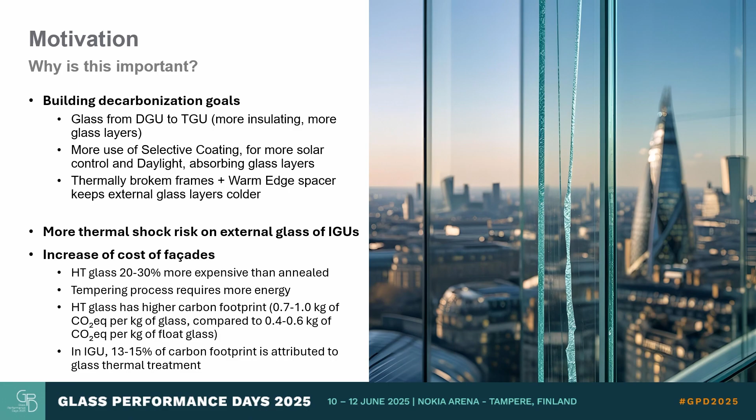So at the end, in an IGU, let's say that more or less 15% of the embodied carbon A1 to A3 of an IGU can be attributed to glass thermal treatment. So there's also an environmental value there.

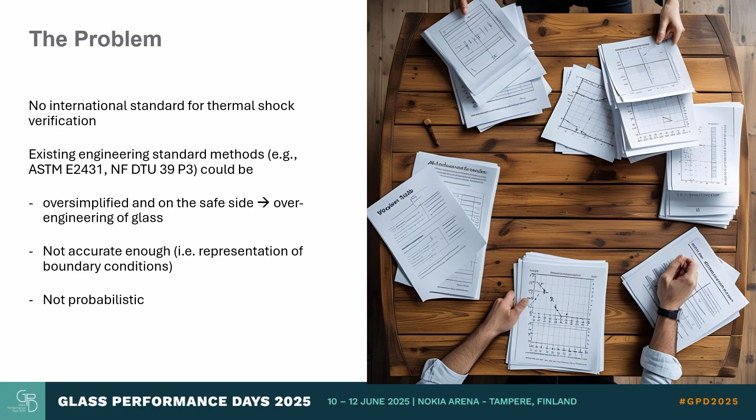The problem is that there are no internationally recognized standards to do a thermal shock risk assessment. There are some existing methodologies in national standards: the French DTU 39 P3 for IGUs and the ASTM only for single glass. These methods could be sometimes oversimplified. It means that maybe we are over-engineering the glass and strengthening it when we don't need to.

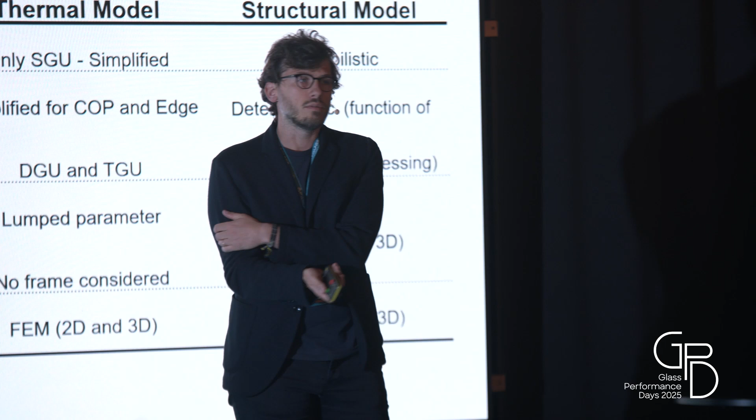The question is whether these are accurate enough. Do they give a good enough representation of the boundary conditions that we have from the climate? And they are not probabilistic. Due to this lack of standards, in the industry there are a lot of best practices to solve this problem. In this table, a comparison between the two standard approaches and more complex best practices related to how you choose the boundary condition, the kind of thermal model and the structural model you use. So in the DTU approach, you use a static boundary condition only for French territory.

The thermal model is simplified, so a one-dimensional thermal model for the center of panel and the edge, only in some conditions for double glazing units, and only partially for triple glazing units. The structural model is a deterministic model, so not probabilistic.

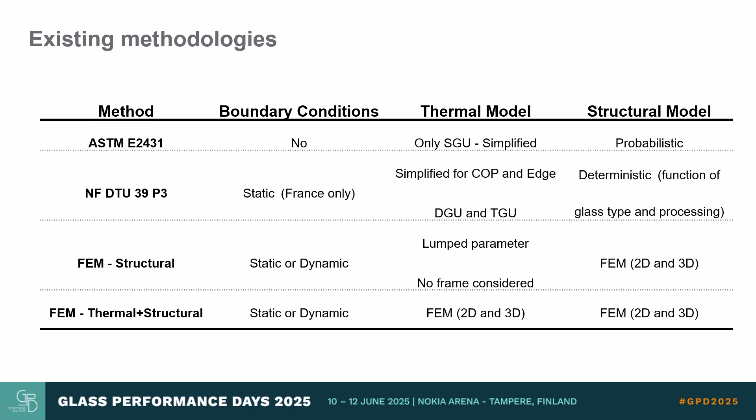In the best practices that are used, and there are different published works, by Permasteelisa or the University of Parma, a FEM structural model is used to evaluate the thermal stresses related to temperature differences that are calculated with a static or dynamic boundary condition, or sometimes with a coupled structural and thermal model altogether.

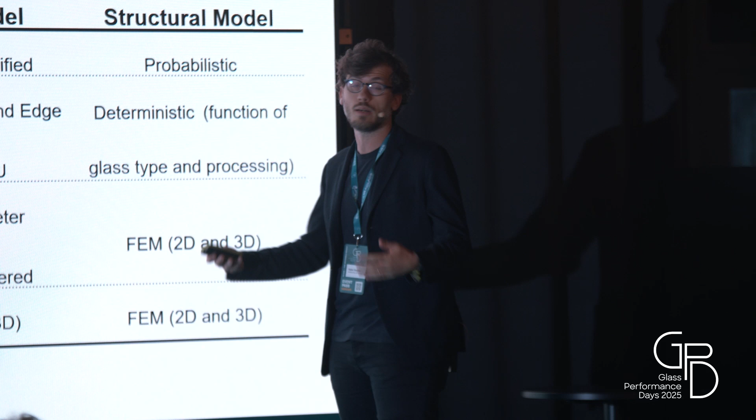So in any case, it seems that there is a lack of a trade-off between enough accuracy and the usability of thermal shock risk assessment for everyday use, because these best practices are very accurate, but they cannot be used by, let's say, a normal engineering studio or a glass processor manufacturer. They can be used for very special projects and conditions. And also, the vast majority of glazing is rectangular vision glass with framing, either windows or curtain walls. So not very special conditions.

So thanks to this project, what we tried to do is to develop a methodology that includes four fundamental steps. First of all, considering a probabilistic climate boundary condition. This probabilistic climate boundary condition gives a statistical representation of the climate, and is then used to have accurate enough glazing and facade element thermal models that spatially resolve this boundary condition for different tilts and orientations.

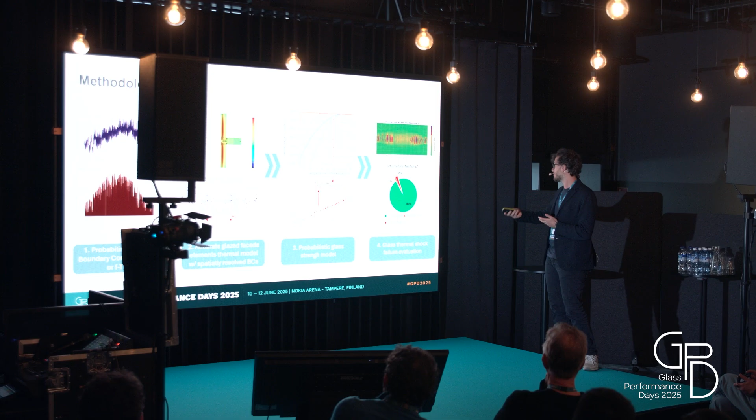And the temperature differences from this condition of the model are then used to evaluate the stress and compare it to the strength for a probabilistic glass model. And then finally, this is used to do a final thermal shock failure evaluation.

So within this presentation, briefly I'll go one by one through these different steps of the methodology. And then what we did is a validation with the inter-software comparison between this methodology and the NF, so the French standard methods. And then a kind of case study analysis to understand where this method could be valuable.

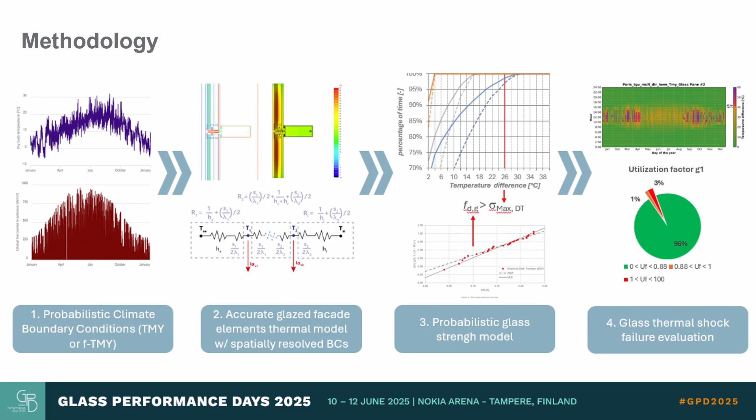So in terms of boundary condition, normally what the DTU does is divide the nation or a certain geographical area into different conditions in terms of temperature or solar radiation, but these are accounted as peak condition, worst case scenario. Instead, what we use is the available statistical representation of climates, which is called TMY, which is a 30-year representation of a climate in one location that then sums up in one statistical year. There are a lot of TMYs already for more than 60,000 climate locations in the world.

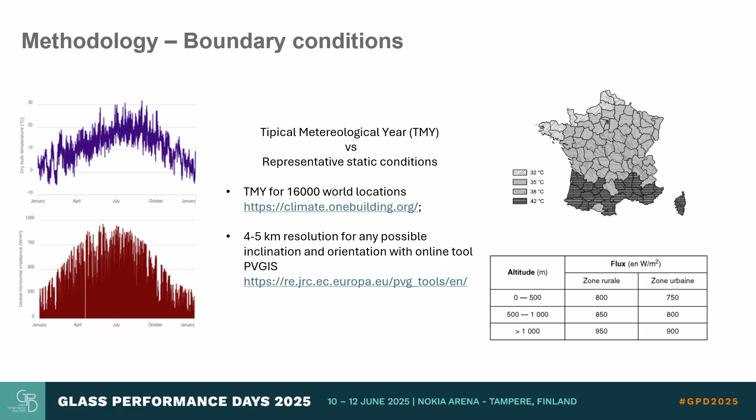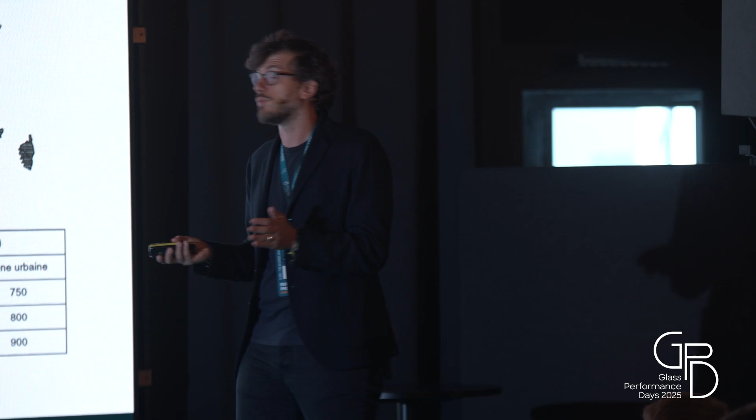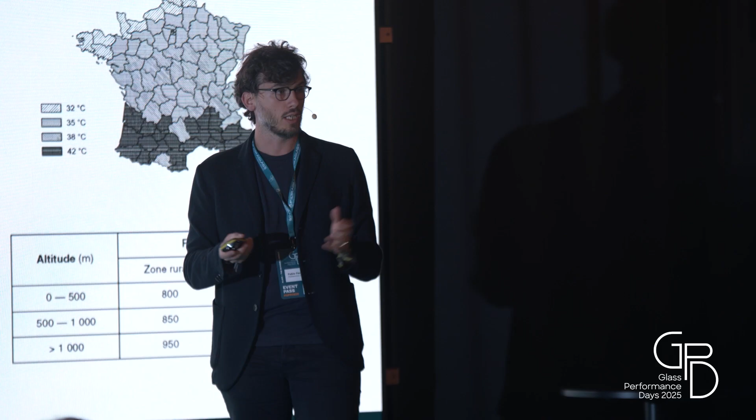That could be downscaled to a resolution of 5 kilometers by means of the PVGIS software that can give not just solar radiation, but also temperature, wind speed, relative humidity of any location in the world with this resolution, but spatially resolved in any orientation and tilt, considering also the albedo of the context that is around.

So then we elaborated basically two models. These are both resistance models, so one-dimensional lumped parameter thermal models. There is one model for the center of the panel and actually different models for the edge of the frame.

The center of the panel model considers the absorbed solar radiation in the different glass layers, of course, due to direct absorption and secondary interreflection between the different glass layers, and the surface transfer coefficients are divided between radiative and convective ones, differently from the French standards, but then it doesn't consider the thermal capacity of the glass, so effectively every hour of evaluation is separated from the other.

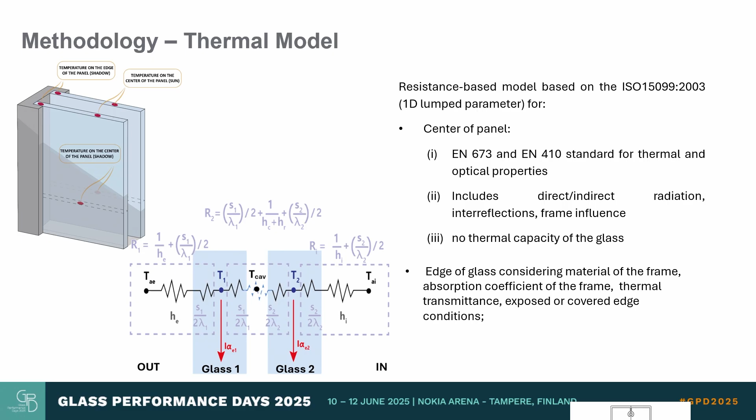For the edge of the glass, we consider different models that account for different frame materials and especially the condition of the edge, whether that's exposed or not, whether the frame is thermally broken or not, and whether it's window or curtain wall. So we developed different models for that.

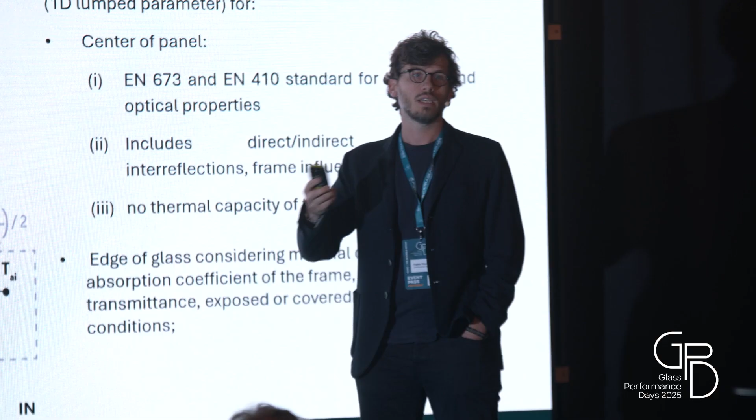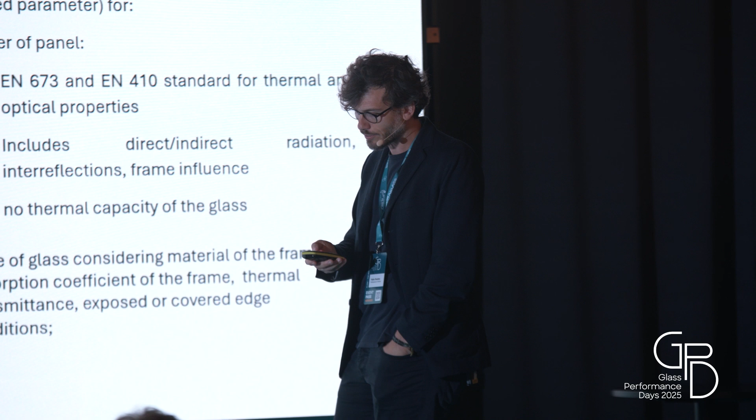And then at the end, we consider the delta T, so the temperature difference that might induce thermal shock within one layer, as the worst combination between the irradiated and non-irradiated center area of the panel and the irradiated and non-irradiated edge of the glass. This delta T is then used to calculate the thermal stress, and this is compared to the design strength of the glass, considering the EN 16612.

In this case, what we use is a k_mod of 1 hour due to the hourly resolution of the climate representation, but also due to the dynamics of transferring heat in the glass, which even in laminated glass are about an hour. They have an hourly resolution.

And then at the end, what we calculate is a utilization factor, which basically is just a ratio between the stress and the strength. Of course, this needs to be below a certain level, in which we are eventually removing a margin of error that we could assume based on the accuracy of our delta T, so how good we are in simulating the temperatures within the glass.

This calculation is done for every glass pane of an IGU, and then we get a carpet plot for a certain pane of the IGU, in which we see the temperature all over the year, but eventually the delta T and then the stresses.

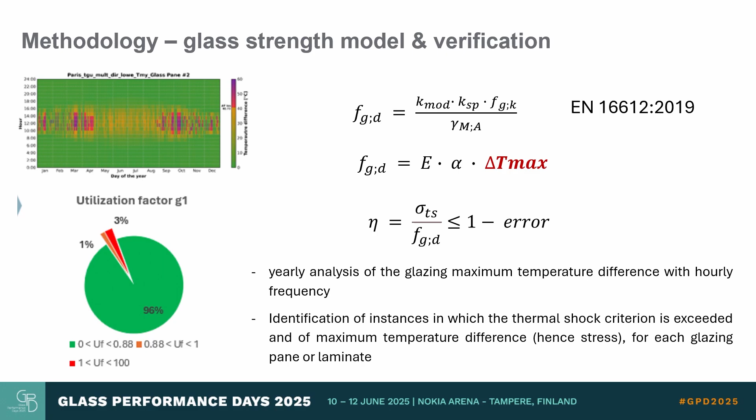And this is basically the amount of time during a year my utilization factor is below 1 minus the safety margin that we want to take, or eventually in a risky area, or if it is red, it's a failure. So whether we are in yellow or red, we won't pass the thermal shock analysis.

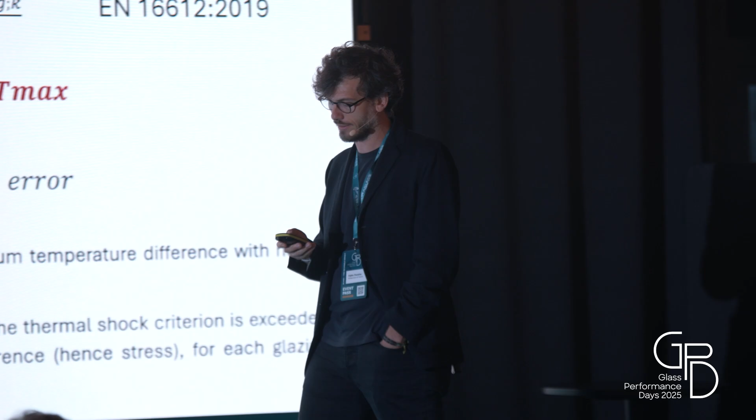So what we did first is an inter-software validation and a comparison between our models and basically Optics and Window software, as far as the center of panel is concerned, for different IGUs and optical properties. We validated the edge of the panel compared to BISCO thermal analysis in different conditions, so 2D FEM analysis for different frames with exposed and capped edges.

And then we also did the modeling for the NF, so the French national standard, to benchmark with our results. And for the national standard, we have two different models. We have a manual one and a simplified one, in which the manual one is the more simple.

That is not dividing the transfer coefficient between radiative and convective. It's only valid for double glazing units. You don't have a model for triple glazing units. And edge conditions are only representative of non-thermally broken frames, while the simplified one is more similar to what we use, but is also simplified in terms of edge condition.

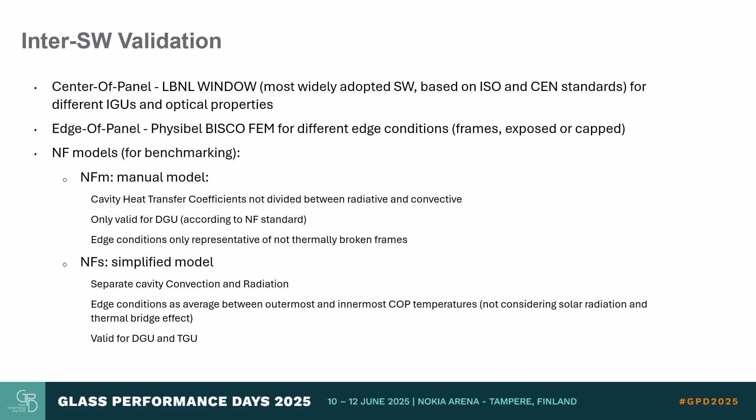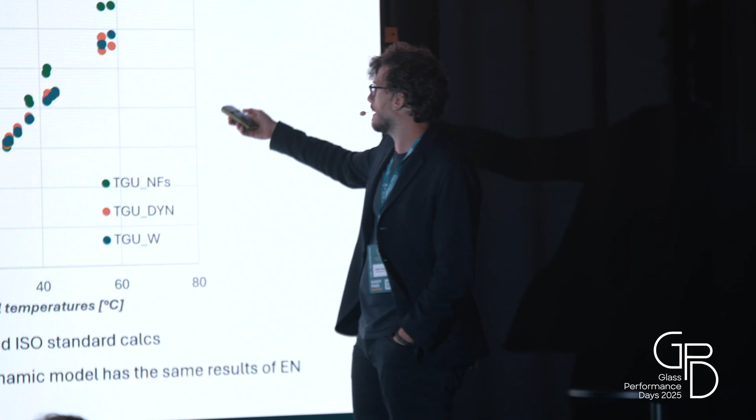So these are the results from the comparison with WINDOW software. Here you have the temperature of WINDOW, here you have the temperature of the different models, and the closer you are to the bisectrix, the closer the results; if you are exactly on the bisectrix, of course, you're having the same results. What you can see is that there is an underestimation of the temperature, especially in the triple glazing unit, when it comes to the NF models, while our model is basically very close to the WINDOW results. That's for center of panel.

When it comes to the edge, I'm just showing the results here for triple glazing units. That's where we don't have a model in the French national standard, for thermally broken insulated frames and for a curtain wall with exposed edge. We did this analysis for 9 different frame configurations with also different edge configurations. What you see here in green are the results from the FEM analysis. In violet are the results from the French national standard for the edge temperature, while the yellow is the model that we elaborated, based on FEM but a 1D model, that is very, very close to the finite element thermal analysis results.

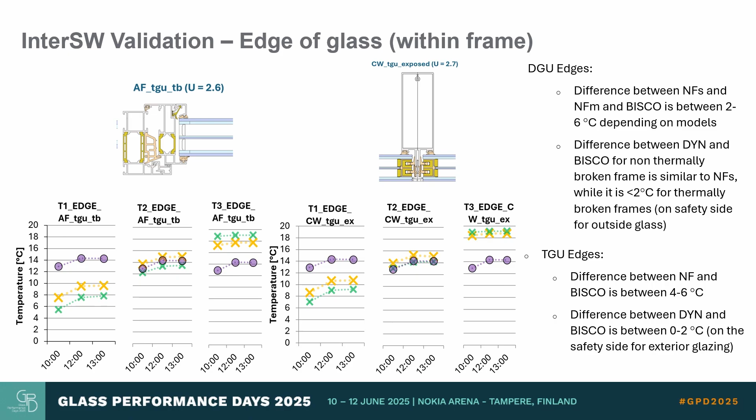So you can see that with the national standard, you have this 4 to 6 degree difference, and sometimes this is overestimating, sometimes underestimating, so it's not always in the same direction. While with our model, we are basically at 1/3 of this difference, and again, this can be over and underestimating.

So we tested this methodology for different configurations of glazing, from single to double and triple glazing units with different optical properties, and you can see the different absorption of the different layers. What I'm presenting is only for aluminum thermally broken frame with a non-exposed edge for a south-oriented facade in Paris and in Torino, in Italy. Paris because it was in French territory, so we could compare like for like with the French standard.

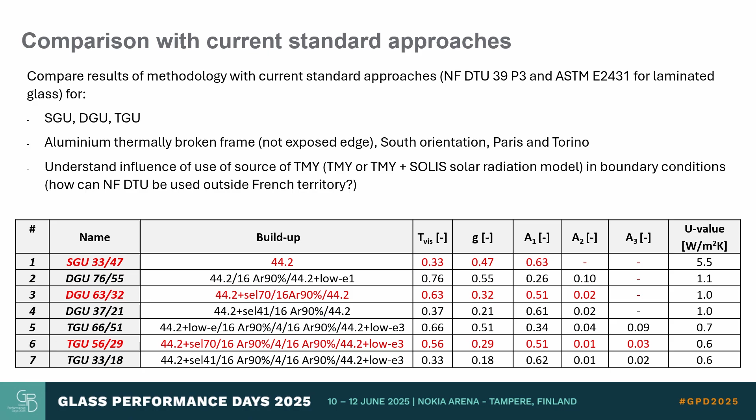And also because it was important for us to understand the influence of how I choose the boundary condition in my thermal shock risk assessment, in which we use 2 sources of climatic data for our dynamic model. One is TMY with real sky, and one is a TMY with a model of only clear sky, which is the TMY plus Solis. That means in that TMY, I'm considering that I have no clouds, I always have clear sky, while in the other one, I have the real one with the clouds.

This is just a summary of the results for Paris and Torino for the different models: the French manual, simplified, our dynamic model, so DYN stands for dynamic model, and then the ASTM, for single, double and triple glazing units for different boundary conditions. The standard is the French national standard within French territory, and then the TMY of just clear sky and the real TMY for the two locations.

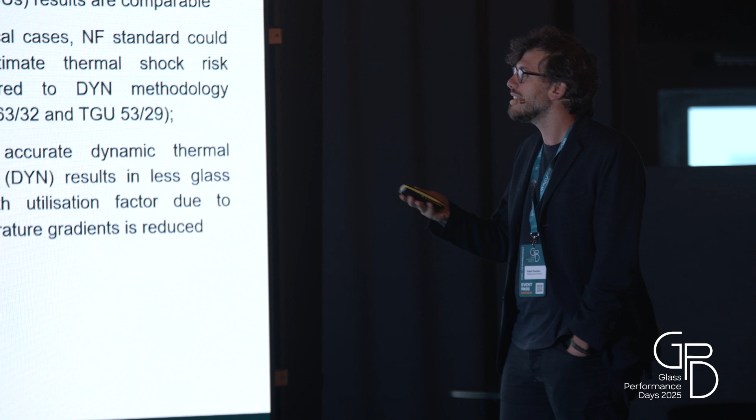What you see here is just a pass or fail for the IGU. It's simply saying whether we could have thermal shock in that IGU or not, but behind this we calculate all the delta T for each glass layer. So this is one result, but then we went deeper to understand what was happening. And of course, for non-critical conditions, meaning glazing that we knew would not pass or would pass the thermal shock risk assessment, the answer from the national standard and the dynamic method that we presented wouldn't change.

But what I'm highlighting is those critical conditions, where the absorption of the outer layer is around 50%, which is the double glazing 63/32 and the triple glazing unit 56/29, where we see that within Paris, comparing like for like with the national standard, in our dynamic methodology we don't have thermal shock, as in the French standard, for both kinds of boundary condition.

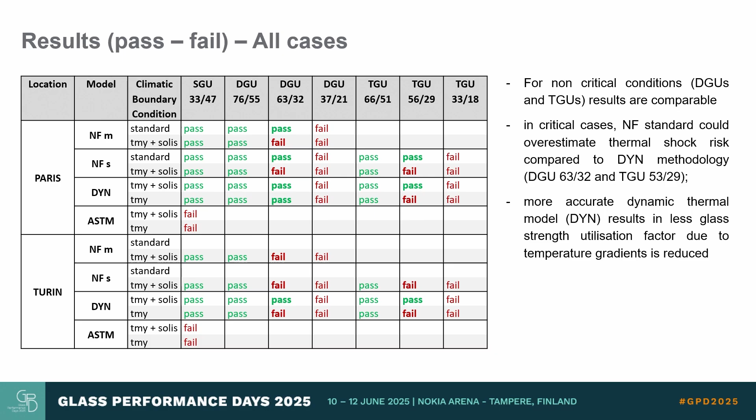While what happens in Torino, for a different climate, is that we would have thermal shock with the French national standard with a boundary condition that is the same that we would use in France but extended to Torino, while we would pass if we use the dynamic methodology with clear sky, but if we use a non-clear sky, that would cause a fail condition.

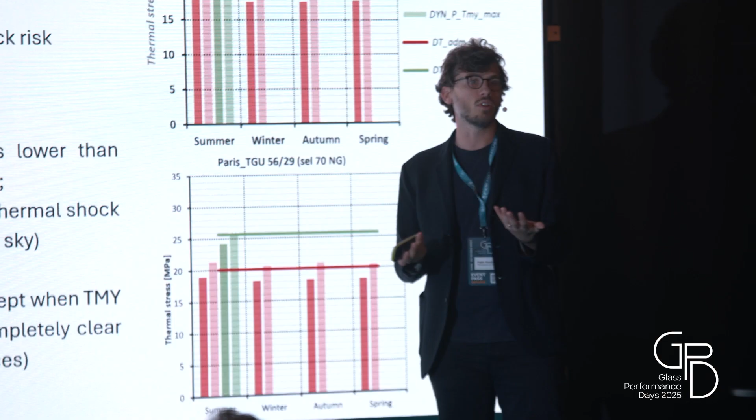So at the end, what we see is that the two methodologies have comparable results, of course, for non-critical cases, but when it comes to the most critical cases, when we use the national standard boundary condition, the stresses are always lower than the admissible glass strength for both double and triple glazing units. While instead, when we use the real sky, the TMY boundary condition, that would result basically in a fail,

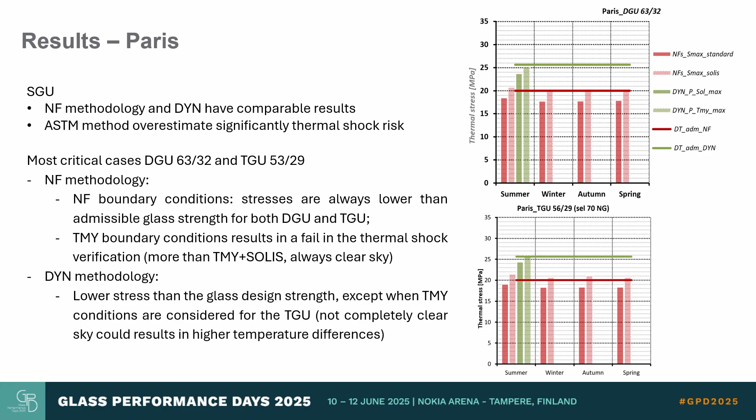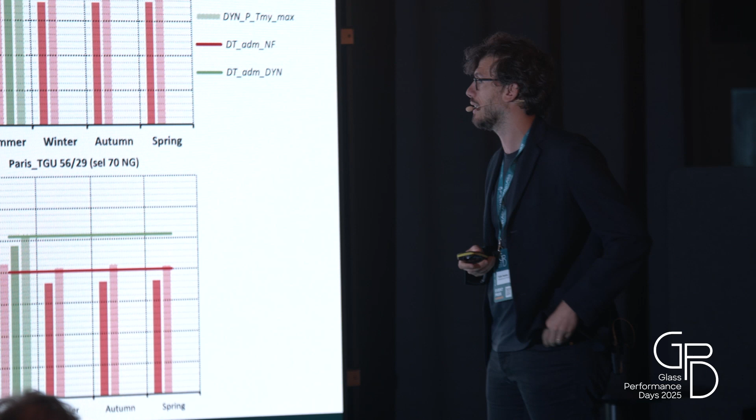and that's with real sky more than what would happen instead with a simple clear sky. And that's because mainly in a real sky I have the effect of the albedo of the clouds that are increasing the peak of solar radiation, and that in terms of delta T would cause an effect that is increasing thermal shock risk assessment.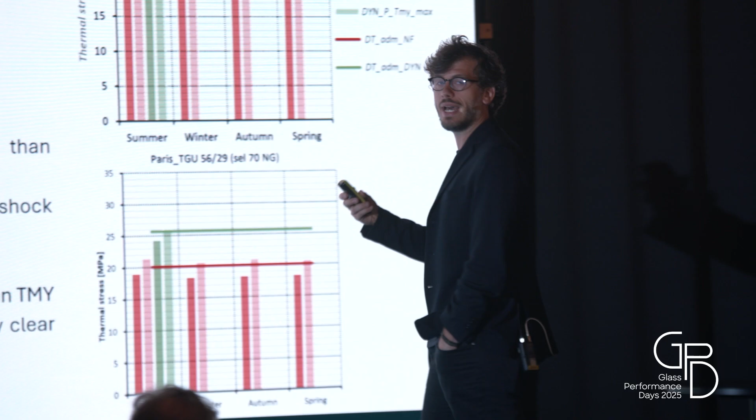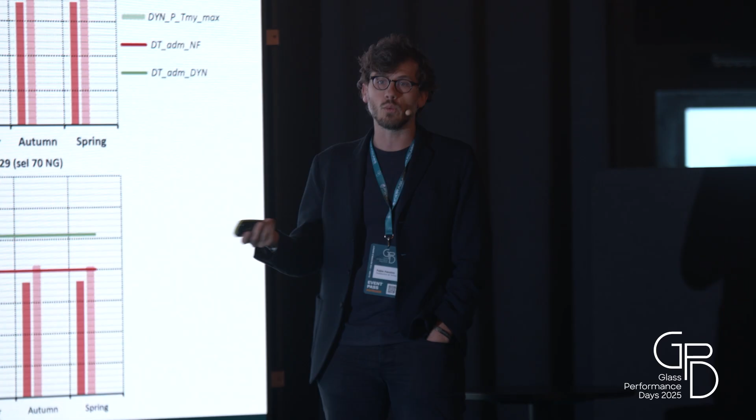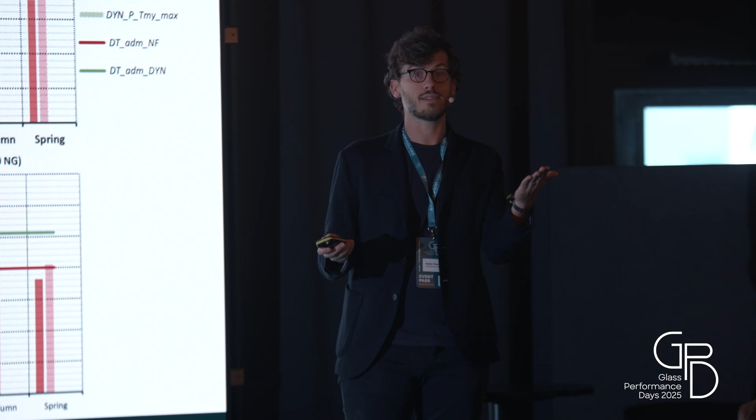With the dynamic methodology, we are able to quantify with a better accuracy the stresses, and these thermal stresses are normally lower compared to what the national standard method is predicting. So in a way with these methods we are able to predict more accurately what is the delta T, but on the other side we are using boundary conditions that potentially are more stressing in terms of thermal shock risk assessment.

But the combination of the two makes us use a methodology that is more precise, so we are able to quantify in a more precise way the utilization factor, and we can use it to engineer the glass better, rather than not knowing what is really happening in terms of boundary condition and in terms of delta T.

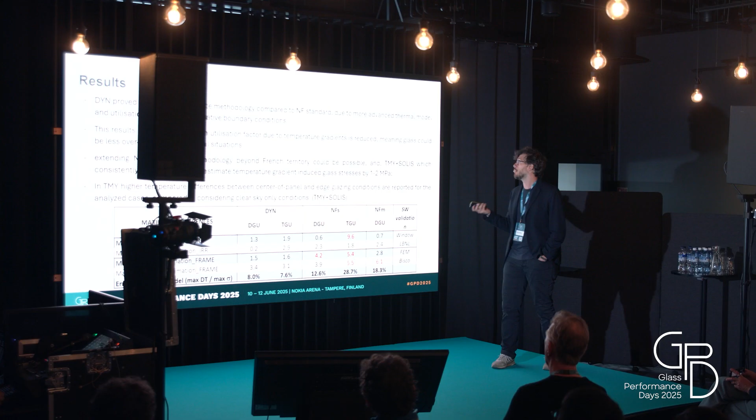So from a general point of view, these dynamic methods prove to be more accurate compared to the NF standard due to the thermal model, but also the representativeness of boundary condition, and this results in less glass strength utilization factor due to temperature stress, meaning that the glass doesn't need to be over-engineered in critical situations.

We could extend the national standard methodology outside of French territory because we found a way to use the TMY representation to replicate those boundary conditions outside France, so we can simply extend that methodology. This, though, marginally overestimates the temperature-induced stresses by a few MPa. And then what we see is that in TMY with real sky, we have a higher temperature stress.

Finally, in this table, what we try to do is to evaluate what is the error in the utilization factor, which is simply the maximum error that we make on the delta T divided by the maximum strength of the glass that we can assume, as a comparison between our dynamic methodology and the national French standard, and divided between double and triple glazing units.

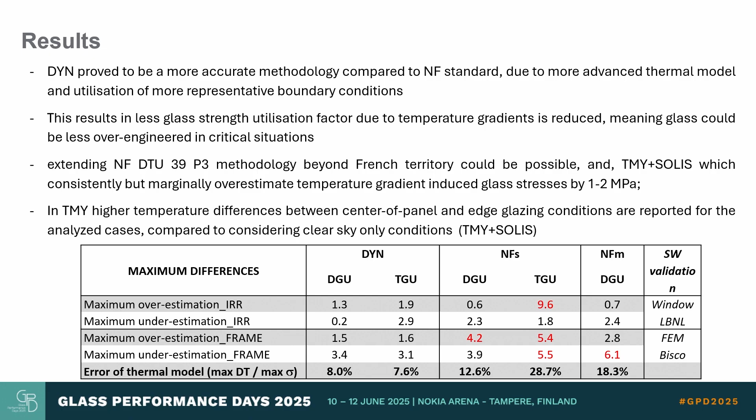And what we can see is that compared to more accurate calculation, the French NF standard basically could make errors that are much higher than 10% in terms of utilization factor. Going to triple glazing units, the error could become very high. That in critical condition, I think, is very important. With our methodology, due to a more accurate thermal model, we can reduce this error to less than 10%.

So the advantage of this dynamic methodology is that we have an accuracy that can be practically used in engineering scenarios, and also boundary conditions that have a better climatic realism, so that we can eventually reduce the use of heat strengthened glass in critical conditions where we could. So we can better engineer the glass from the point of view of thermal shock.

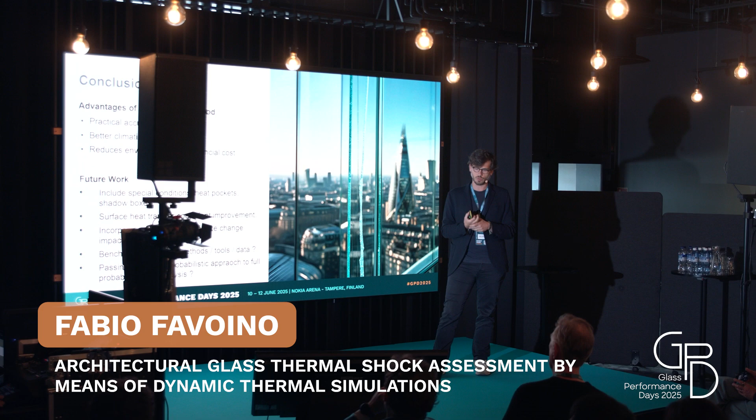Future work will include not just standard conditions, but special conditions like heat pockets or shadow boxes. We want to improve a little bit how we model the outdoor heat transfer coefficient, also with the exchange with the sky, and incorporate in this methodology smart glazing and also climate change impact. The advantage of the TMY is that you can downscale to predicted future climate scenarios, so it's very easy to consider this in thermal shock analysis.

What we want to do is also benchmarking with other tools and data, where data exists, related to temperature difference in glazing, and then we want to pass from a semi-probabilistic approach like this to a fully probabilistic approach, but this is kind of a big question mark.

The practicality of using this tool is demonstrated by the fact that this is an online tool, and you can do this analysis live. And this is powered by a software house that was partner of this research project. So you could try this dynamic method, and it's actually very important to try it so that we can benchmark it and discuss the validity and usefulness of it. So try it, and we're happy to hear feedback from you.